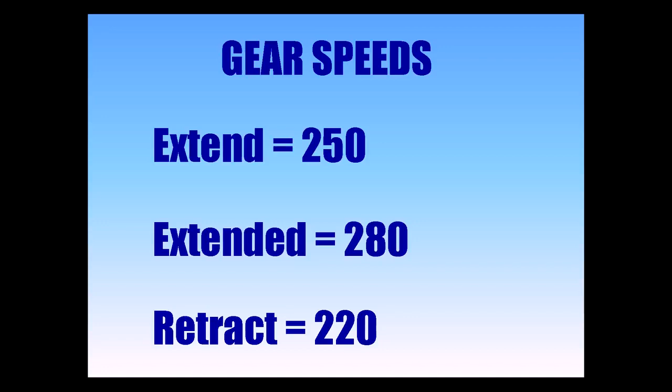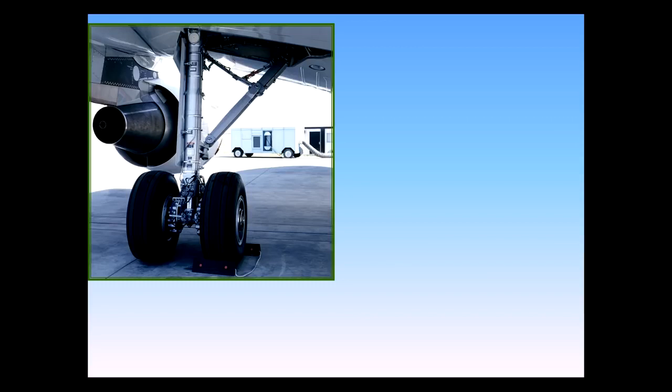The A320 is equipped with dual-wheel main gear, which retract inboard, and a dual-wheel nose gear, which retracts forward.

The wheels of the main landing gear are equipped with carbon brakes for efficient braking even at high temperature, an anti-skid system, and an automatic braking system.

The nose gear is equipped with nose wheel steering.

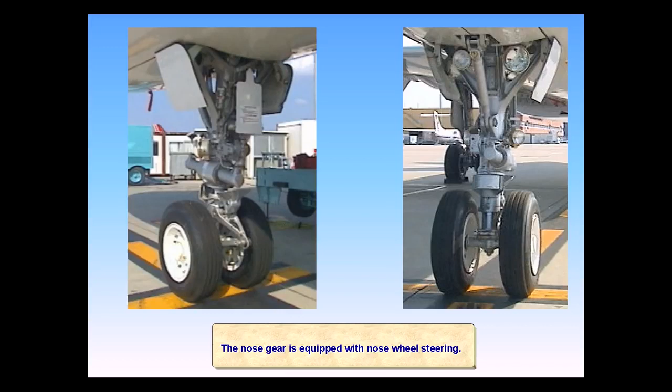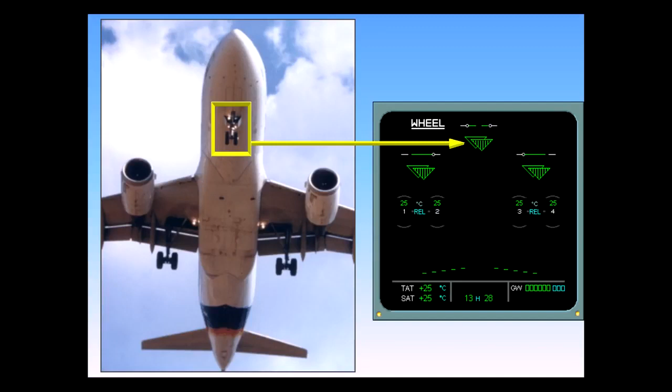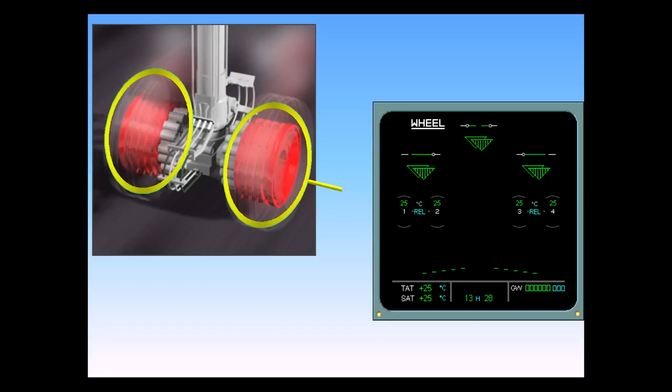The ECAM wheel page displays indications for the main landing gear, nose landing gear, landing gear doors, and brake temperature. In the center of the page, green and amber messages can be displayed to provide normal and abnormal indications.

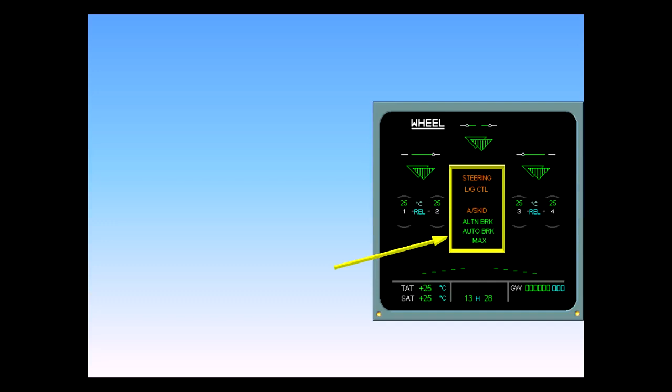Since the wheel page is displayed during landing, spoiler position is also displayed at the bottom of the page for quick reference.

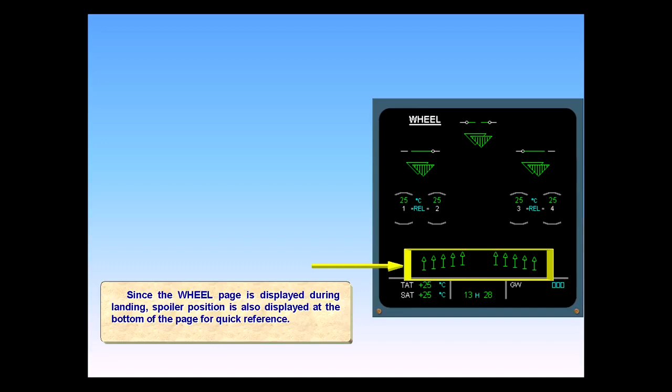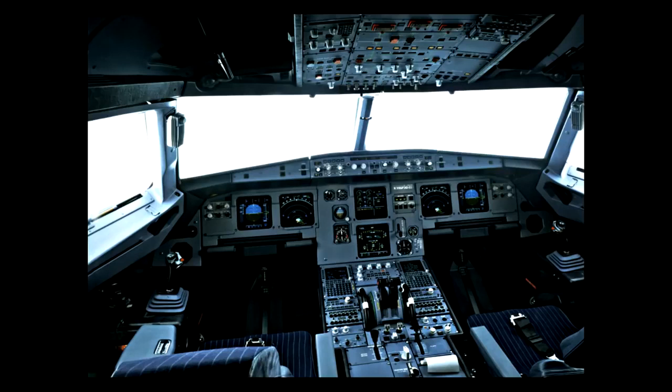Let's go to the cockpit to locate the controls and indicators for the landing gear, brakes, and steering. The landing gear selector lever is located on the center instrument panel.

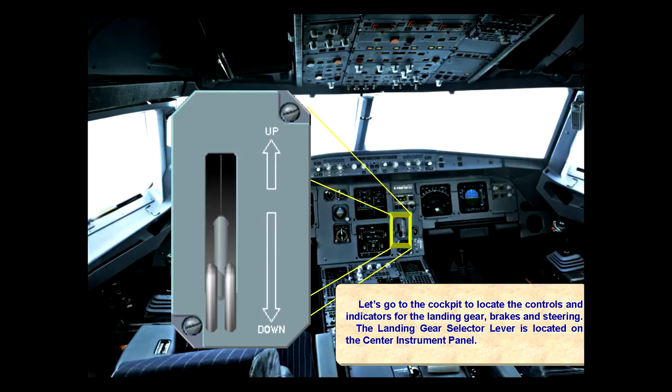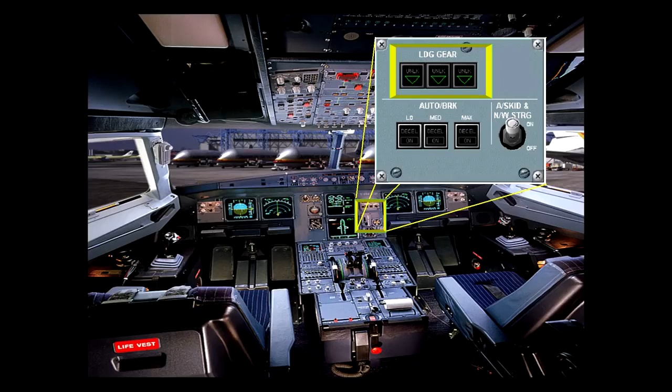Just above the landing gear lever is located a panel which contains switches and indicators for the landing gear, the auto brake, and the anti-skid and nose wheel steering.

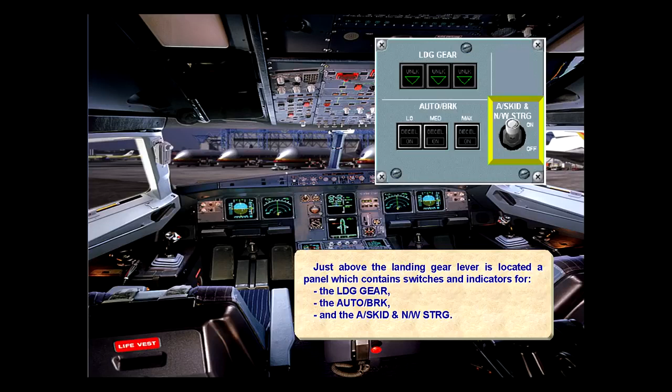Up, down, and unlock indications on the gear panel are associated with position indicators on the wheel page.

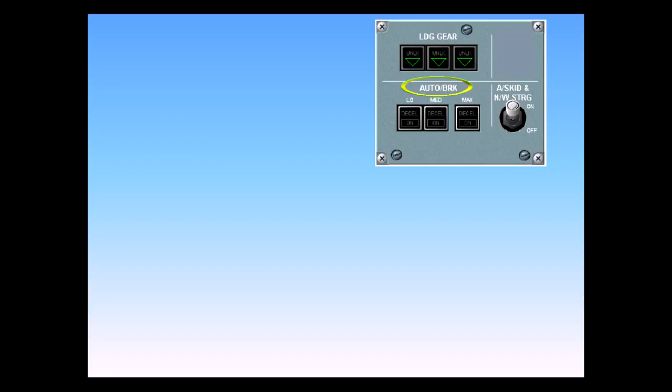When auto brakes are used, selection of low, medium, or max is made using these push-button switches.

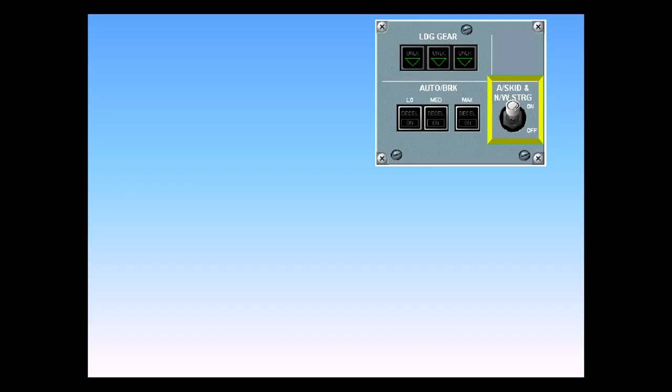This switch controls both the anti-skid and the nose wheel steering through the brake steering control unit, the BSCU. Left in the on position for all normal operations, it is switched off only in case of specific malfunctions.

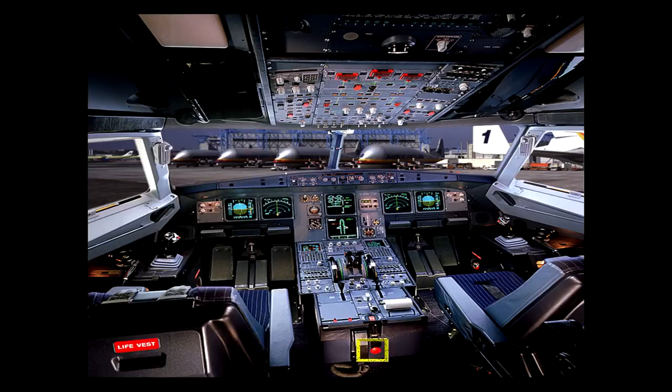The landing gear gravity extension handle is located on the center pedestal.

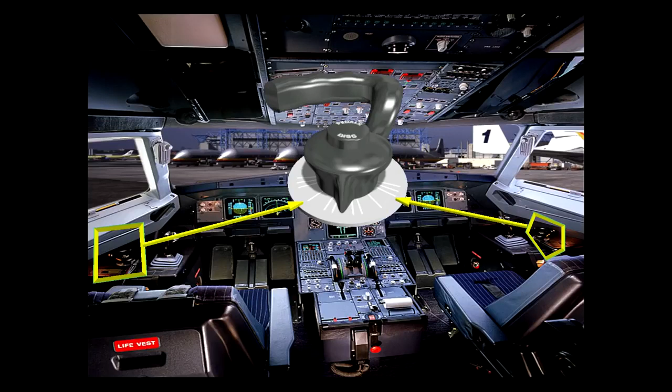The steering hand wheels are located on each side of the cockpit, so either pilot can taxi the aircraft. The rudder pedals can also be used to steer the aircraft. Note, United Airlines policy states that only the captain may taxi the aircraft using the hand wheel.

During taxi, either steering hand wheel can be used to control the direction of the aircraft. The steering hand wheel provides 75 degrees of nose wheel deflection, left or right.

Signals from each hand wheel are summed up. If two hand wheels are moved in the same direction, the nose wheel deflection will be equivalent to the sum of the hand wheel commands.

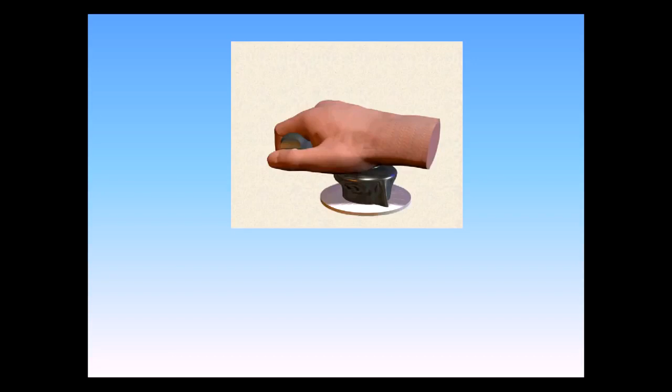During taxi, the flight controls must be checked. To check the rudder pedal, the disconnect switch must be held down. This button disconnects the nose wheel steering from the rudder so that full deflection of the rudder pedals can be checked against the indications on the ECAM flight controls page.

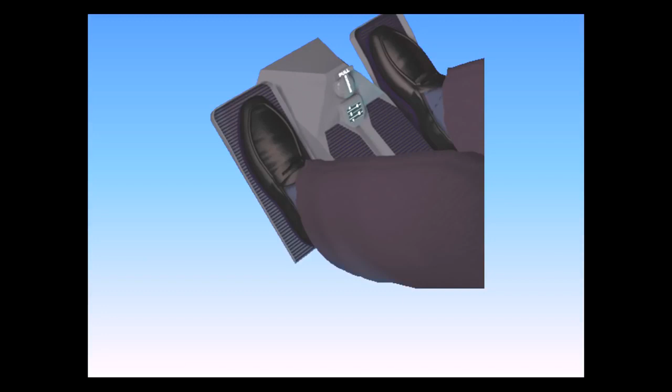During takeoff, the aircraft direction is controlled exclusively using the rudder pedals. The rudder pedals provide up to 6 degrees of right and left deflection at low speed. As the speed increases, this deflection angle decreases progressively until 130 knots, when directional control is 0% nose wheel and 100% rudder.

The rudder pedals are located on each side of the center pedestal. Manual braking is provided using the top of the rudder pedals.

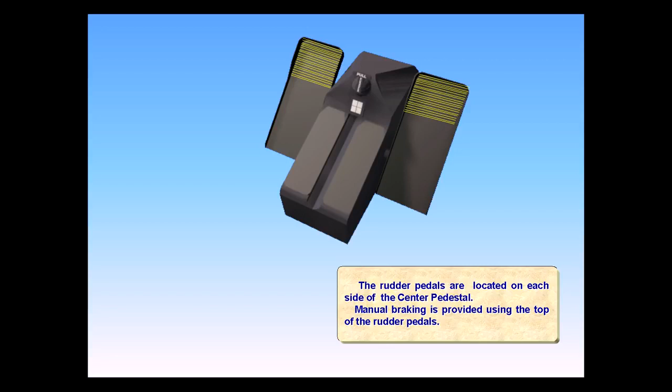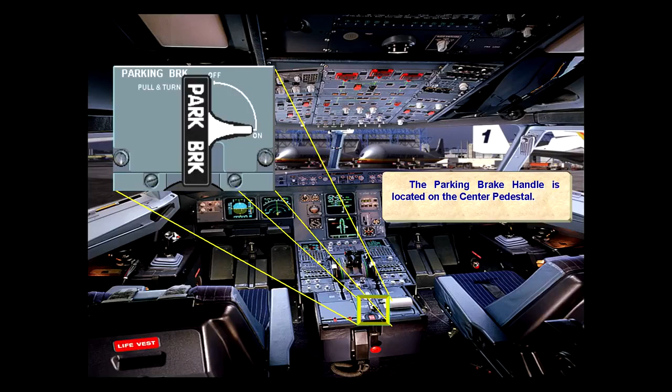The parking brake handle is located on the center pedestal. The A320 provides two braking modes: normal braking, which is brake by wire, and alternate braking, a conventional low-pressure hydraulic signal.

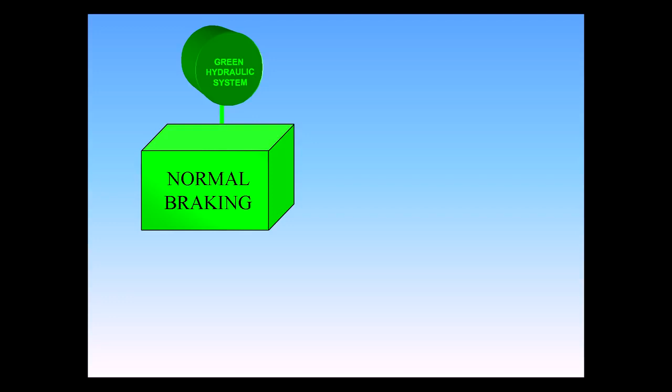Normal braking, which is powered by the green hydraulic system, utilizes electrical signals which are sent to the BSCU, Brake Steering Control Unit. The normal braking provides auto brakes, manual brakes, and anti-skid.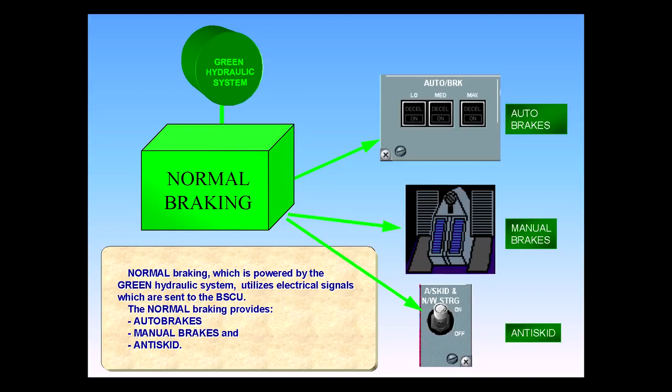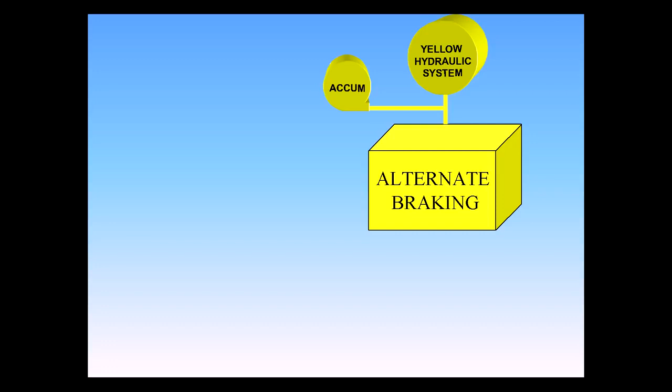Alternate braking is powered by the yellow hydraulic system. The alternate system is backed up by a hydraulic accumulator. The alternate braking provides anti-skid, depending on failure, parking brakes, and manual brakes.

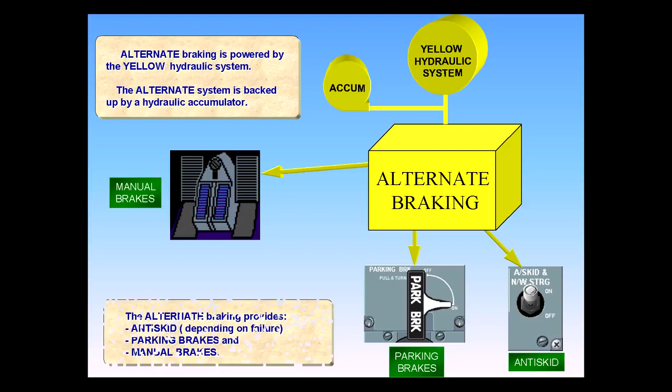This is a schematic of the green normal brake system. Electrical signals from the brake pedals activate the BSCU, which sends a signal to open the normal selector valve. Hydraulic pressure then opens the automatic selector valve. Pressure is modulated by the anti-skid system to the normal servo valve. Note, in the green system, there is no pressure indication shown on the triple pressure indicator.

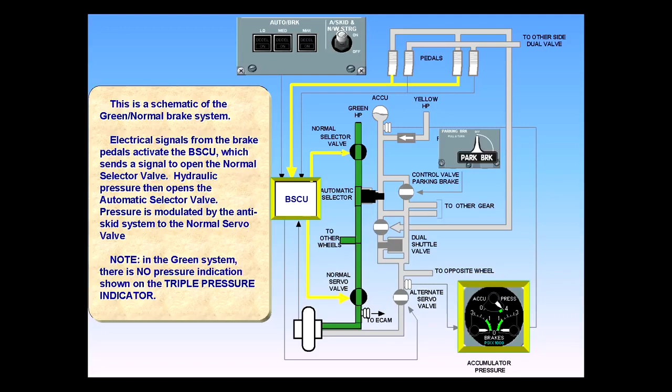When auto brakes are used, electrical signals are sent directly to the BSCU from the auto brake system. The normal selector valve is opened, allowing pressure to open the automatic selector valve. The normal servo valve is modulated by the anti-skid.

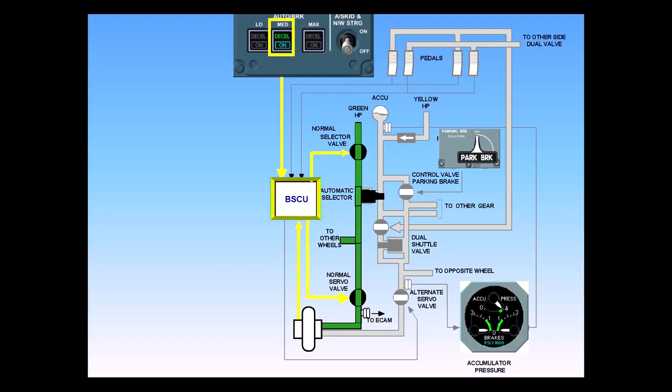The ABS uses signals from wheel tachometers and the ADIRS to compare the actual deceleration rate to the selected rate. When 80% of the selected rate is achieved, spoilers, reversers, drag - a green deceleration light illuminates. Once again, there is no pressure indication shown on the triple pressure indicator.

If green brakes fail, or if the anti-skid and nose wheel steering switch is turned off, the yellow system takes over automatically. The normal selector valve closes.

Yellow pressure pushes the automatic selector valve open, allowing hydraulic pressure into the alternate brake system. The brake pedals send a low-pressure hydraulic signal to the dual valve.

If anti-skid is available, the alternate servo valve modulates the pressure. When using alternate brakes, there is pressure indication on the triple gauge.

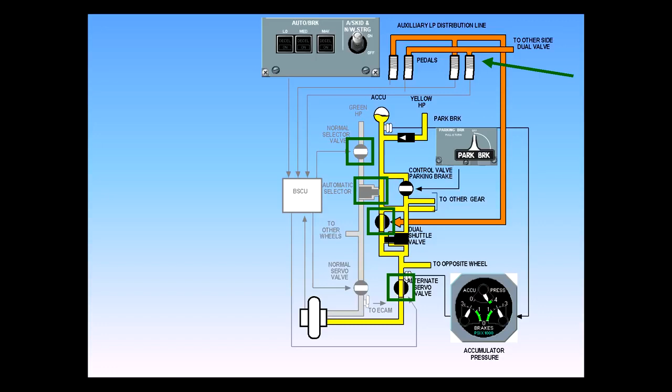If the failure has also caused the loss of anti-skid, the alternate servo valve will open fully. The pilots must monitor the hydraulic pressure on the gauges. Brake pressure must not exceed 1,000 psi.

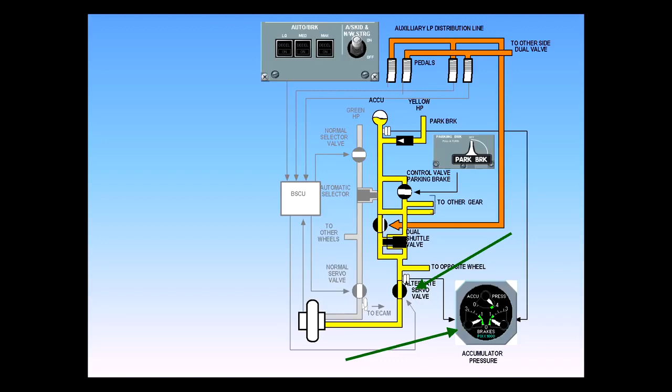The parking brake handle is located on the center pedestal. When activated, the control valve opens, allowing yellow hydraulic pressure from the pump or the accumulator to lock the brakes. All other braking systems are deactivated.

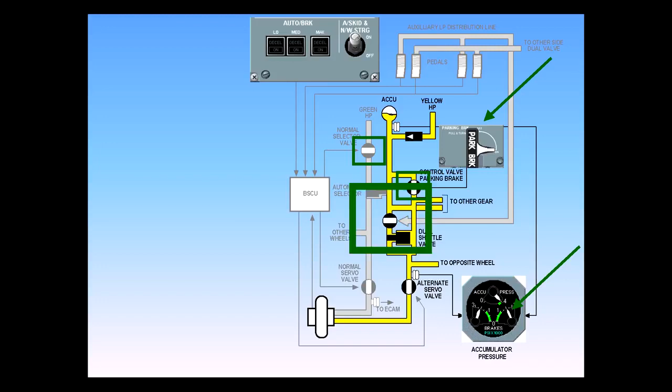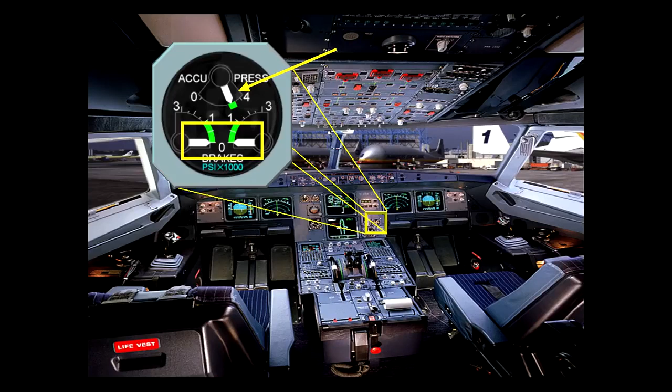This gauge, which is located on the main instrument panel, measures yellow system pressure only. The accumulator pressure gauge will always register accumulator pressure as long as the aircraft is powered. The brakes gauges measure yellow pressure to the left and right wheels. When normal or green pressure is active, these gauges read 0.